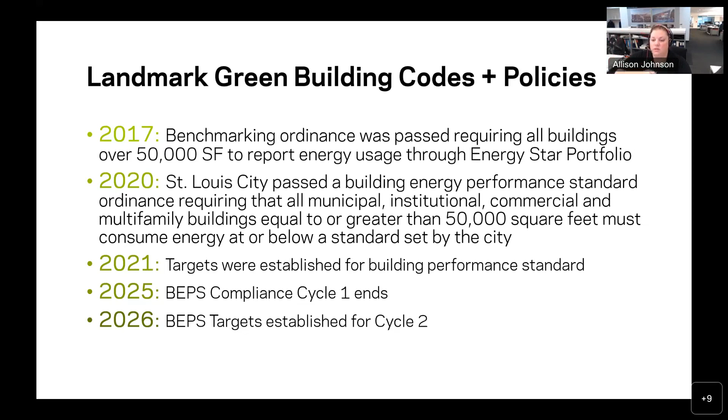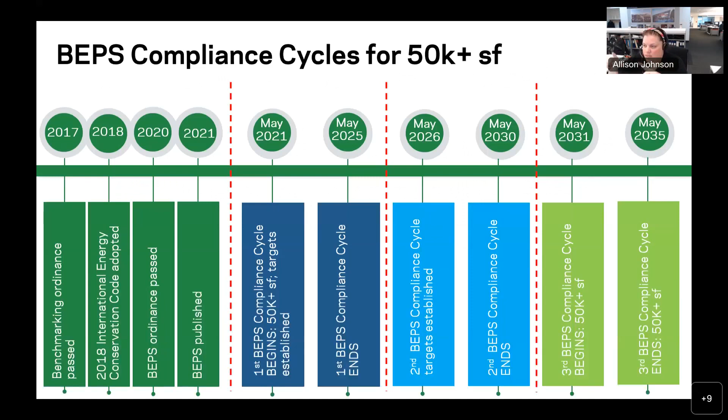It's critical that we are all informed and understand how all of this works. And then cycle 2 basically will be started based on those numbers in 2026, is another way to look at it. You can see the timeline: yes, it ends in May of 2025, but it's 2024's numbers that will be reported in May. Then in 2026 we'll know what the next cycle is based on.

And this is what I meant by the line in the sand. We are being compared, all of our projects are being compared to buildings of the same type. And as Emily eloquently put it, 65% of our buildings in the city of St. Louis will need to make improvements of some sort, whether that be retro-commissioning or some sort of energy efficiency measures, in order to get below that BEPS line, and that is based on our local data.

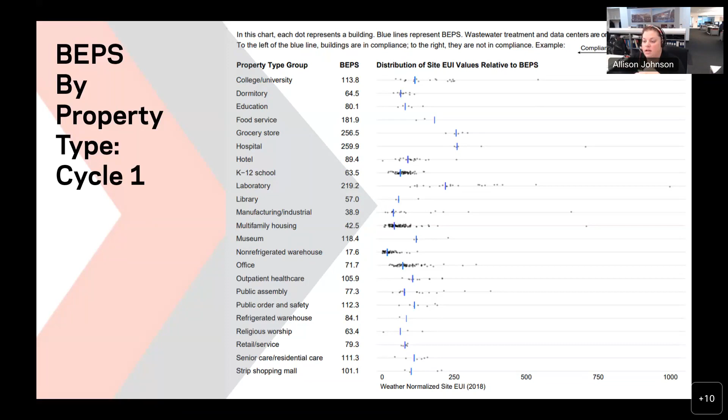So it's based on our local site EUI, and it's based on building type, and everything over 50,000 square feet. So we will get into energy modeling and CDs.

All right, so we talked a little bit at Module 1 and 2 about the ASHRAE 209 standard, which is a really good standardization of what type of modeling you might want in the design process, what kind of feedback you're looking for, what kind of workshops you might hold and when, who should be participating or discussing or even running the model, and which cycles you may or may not want to include in your basic services or as additional services.

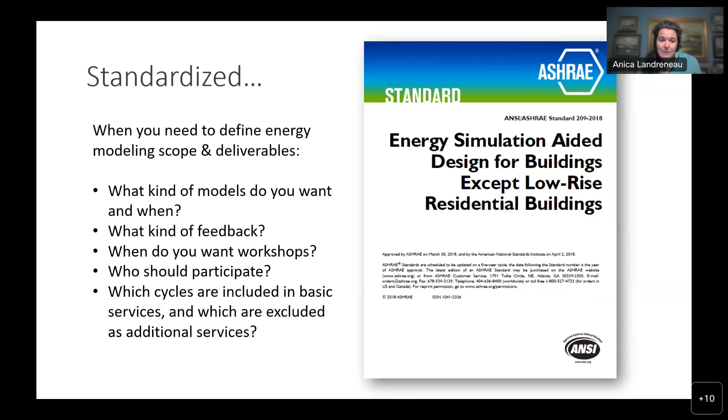So that continues all the way through design, as we've discussed in Module 2, and all the way through even CDs as you wrap up design on the project. It may even continue into construction. Go ahead.

So in the last module, we talked about the general requirements, load reduction modeling, and then some of these, as the standard considers them, optional design model cycles. We did talk about the last two, design integration and optimization, and energy simulation-aided value engineering as well. But it's important to note these do overlap between the concept, SD, and DD phases we've already spoken about, as well as construction documents, which we're talking about today in this module.

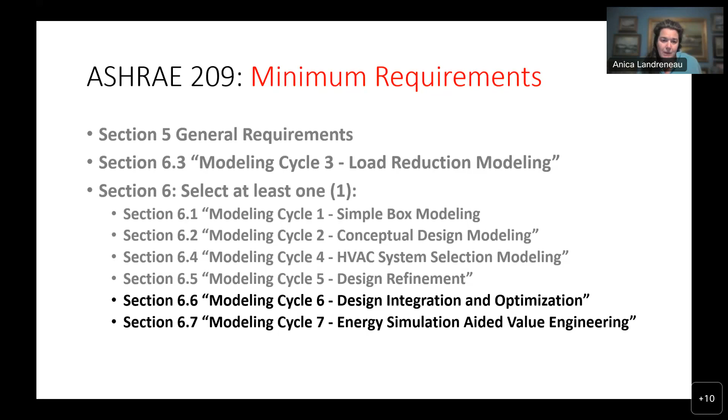We also just touched on the as-designed energy performance model. Now the 209 standard considers that a construction phase cycle, but really what it means is you're 100% done with design, your design is complete, and you're recording everything that you issued for construction. So it's kind of in that space during bidding and negotiations, that closeout of the design phase.

In the construction administration phase, there are also modeling cycles for change orders, as-built energy performance, and post-occupancy energy performance comparison. These are often additional services because you don't know what you need until you get into construction administration, but we'll go through what they're for and when you might want to use them.

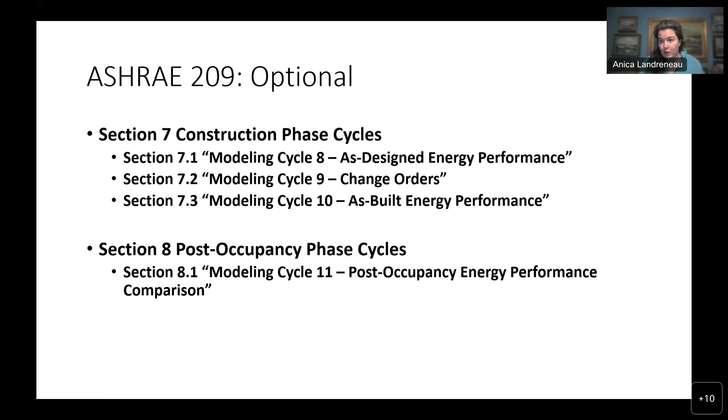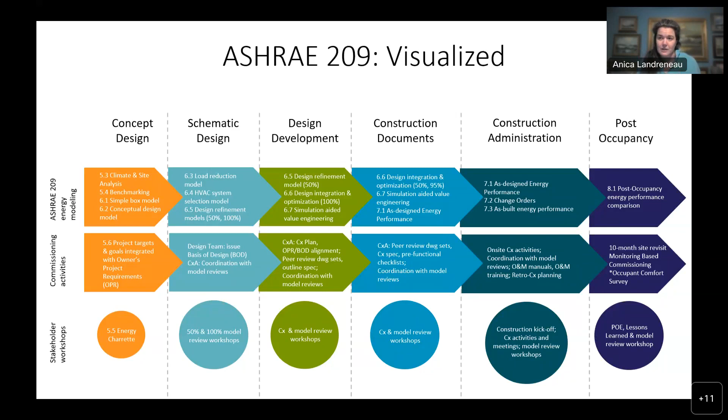This is all about keeping your eye on the ball. You've set targets with your owner prior to design, and with the team during the design process, iteratively benchmarking the design against those targets. Now this is making sure those project performance goals are executed during construction documents, become part of the construction documents, and are executed again in construction administration.

So we're going to get into specifications a little bit. I know our spec writer is on the call, so I won't call them dry, but the slides are dry. We'll establish that off the bat. But what we're really sharing are the ways HOK has started to include these in our specs. We're not saying this is the way you have to do this, or to copy this verbatim, but this is a suggested pathway towards implicitly and explicitly sharing how the BEPS can influence your project and then ensuring how that's incorporated.

So we're going to go through these different sections. I think specifications are kind of interesting myself. It's like the story of your project. You have the illustrations, if you will, in your drawing set, and this is the narrative. It really does tell the story of everything that goes into the building or project, and why. So I really get excited about specifications.

Most firms start with a master spec format, then have their own firm-wide customization layered on top, and then per-project customization. This is our approach: that formulaic master spec with our own modifications we'd generally apply, and layered on top of that is the language for building performance standards.

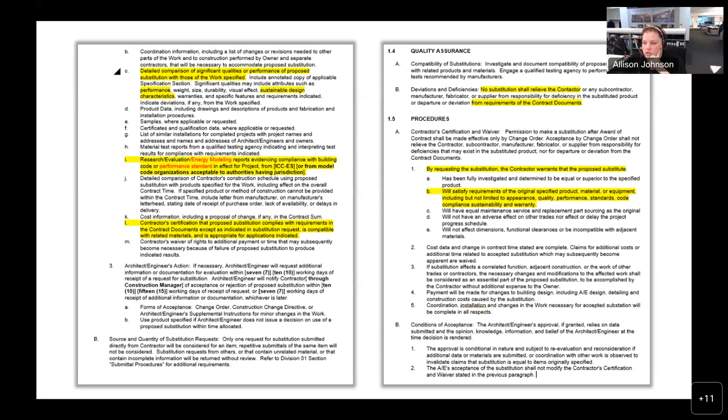I'm just working on a federal project in Salt Lake City, and one of the cost saving measures was to remove the mineral wool insulation from the project. So we were able to get the same energy code, but it was another different aspect of sustainability that we were concerned about, and had to rerun the embodied energy calculations by switching it to spray foam, which was much higher than mineral wool, except that it was a very low percentage of the overall impact of the embodied energy of the building. So not totally related to BEPS, but something we've run across recently.

And then the additional language here is: requested substitution provides energy performance characteristics that specified products provided for achieving the building energy performance standard. So explicitly stating it in the section under products. And then additionally, requested substitution provides energy performance characteristics that specified product providing energy - so twice, depending on which substitutions section.

For cause and substitutions for convenience - there's different reasons you might have a request. You want to make sure the language appears in all of the different substitution language. But it could be a glazing unit, it could be insulation, it could be clips that hold the cladding to the building that might be thermally broken versus not thermally broken. There's all kinds of things that might be impacted by a substitution at this stage.

So you want to just make sure there's a reference point here that says this does need to uphold not just the energy code, but the performance standard target as well. And not just HVAC equipment because of lead times.

We have added a little modification here too. This is just the form, but it's the same language as the previous slide, where proposed substitution does not affect the compliance with the building code or performance standard in effect for the project. And this is an application for that substitution. So when the contractor is filing an application for that substitution, they are attesting by signing this form that they have already verified that the product they're asking to substitute would not alter the building's compliance or the project's compliance with the building performance standard.

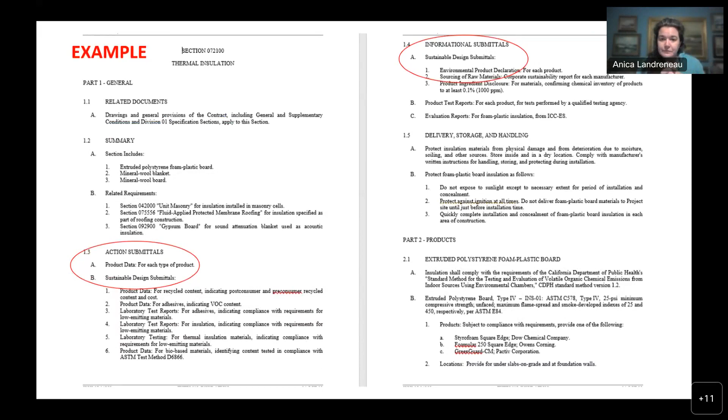The next section we looked at is quality requirements. Towards the end, under the quality requirements, we have a lot of our testing. So if you are doing things like enclosure commissioning, assembly testing - this is where you may want to include some of those criteria.

These criteria may be enhanced because of the performance standard and the overall performance requirements of the project. It's also consistent with the energy code and commissioning requirements within that. Under pre-construction testing is where Anica brought that up.

The next section is product requirements. Under definitions, comparable product is something we believe definitely overlaps with BEPS and in-service performance. We're currently addressing some of those things, but under submittals is where we would see additional requirements.

Some projects can't use proprietary specifications - maybe it's a public or institutional project, or we're providing something that basically sets the performance standard but we expect different comparable products to be submitted for approval. This is just something to note.

We're not adding new language here, but this is a section which could refer to the building performance standard and energy performance of the product - using your specifications in this way.

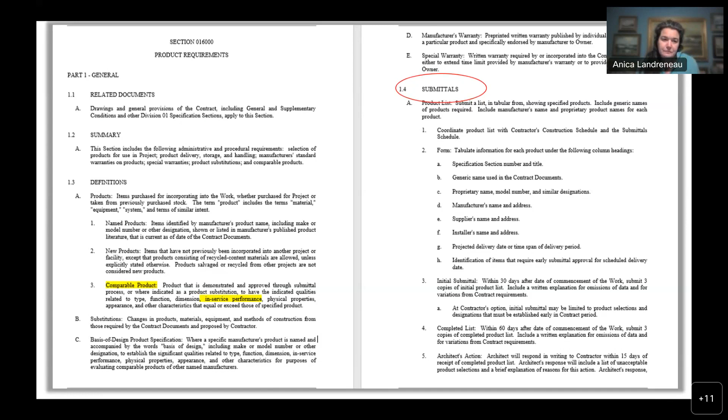Here's some more samples of product data sheets where we might be looking for thermal information and requiring it. As noted, you might be looking for multiple attributes - embodied carbon, R value, emissions and air quality data.

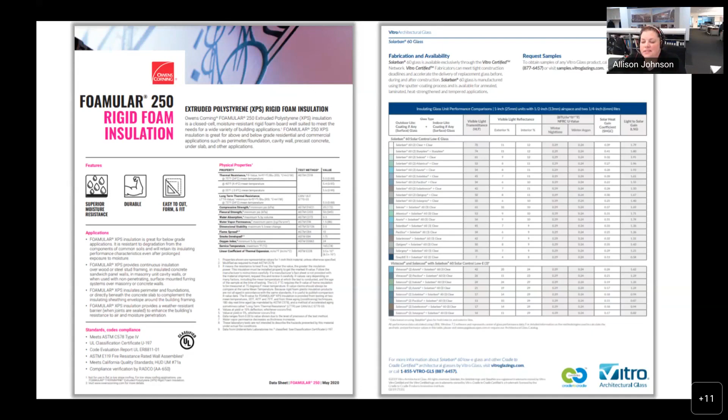It's important to look across all attributes included in your specification, particularly with a substitution request. One that came up in a meeting today was sound - we had a lunch and learn today about sound quality and transfer of sound, so always measure things against multiple data points.

Substitution requests - this part of the section highlights detailed comparison of significant qualities of proposed substitutions of the work and research evaluations. What we added here is evaluation reports evidencing compliance with building code or performance standard.

In effect for the project, from model code organization, then adding local code or building performance standard development body, acceptable to the authorities having jurisdiction. We note this because sometimes the buildings department and jurisdictions aren't setting the standard nor necessarily evaluating compliance with the standard.

So we don't want to just refer to model code bodies or the buildings department. We want to make sure we've added enough language to sufficiently cover the different entities within a jurisdiction that may be enforcing the building performance standard and setting the standard in the first place.

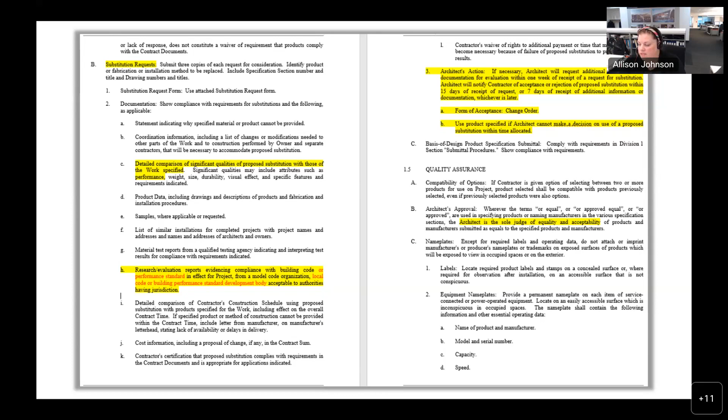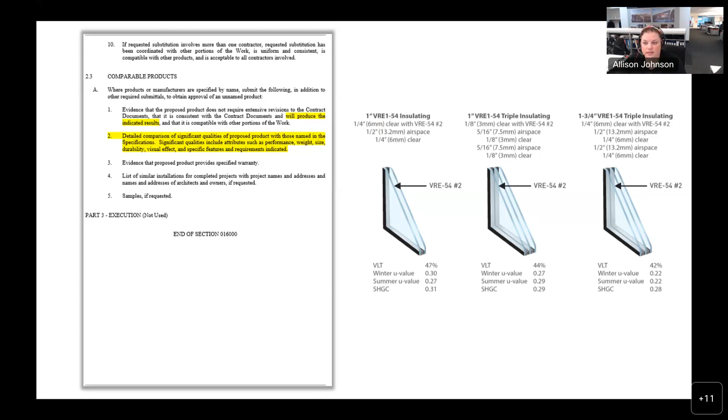In addition, we're highlighting the architect's action statement and reminding that the standard specs also include that the architect is the sole judge of equality and acceptability, which applies to the building energy performance standard. Under comparable products, we're looking at whether it will produce the indicated results, and the standard includes a detailed comparison of significant qualities of proposed products with those in the named specification. Significant qualities include attributes such as performance, weight, size, durability, visual effect, and specific features. So again, we're measuring against multiple attributes of these products, but reminding that we have the ultimate say in whether that gets included.

If you are working on a LEED project, you've probably already seen this section for sustainable design requirements, and this often includes LEED meetings and action submittals, LEED requirements for sustainable products. This is something that can be aligned with building performance standards.

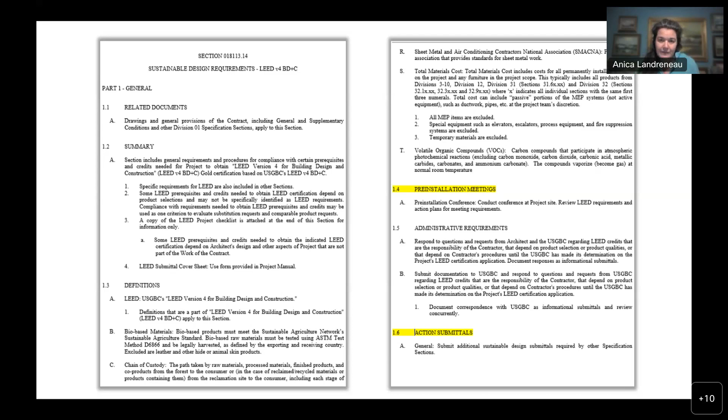We actually created a new section that can go into our specifications, in addition to or when it's not a LEED project, all on its own. It references back to the language discussed with E204, the owner-architect agreement, and our architect consultant agreements, making sure these same terms already defined with our owner and consultants are now defined in a contract document for the general contractor and their subs. There's a reference back to compliance period, building performance compliance, building performance reporting, etc. We think it's really important to get that language replicated in this contract document for construction of the project. This example references DC code, but I'll be adapting it for St. Louis on two upcoming projects.

Most importantly, at the end of this section, we included a summary of the energy model report, the final as-designed energy model report. You can attach an entire energy report if you'd like, but in this case, a summary that says: here were the modeled kilowatt hours, BTUs, site energy use intensity, source energy use intensity, greenhouse gas emissions, energy cost, annual energy cost, annual energy use targets, Energy Star Target Finder score, whatever outputs you think are important, putting those in the contract document as a point of reference.

So after that, they kept the language in. It really is about mitigating risk. How much cheaper is it to energy model a few extra rounds than to be out of BEPS compliance? I think that's what we remind our contractors at those moments.

So some of the modeling that might help support keeping our eye on the ball during construction includes the change order model and as-built model. An as-built will come at the end of construction, and the change order could happen on an as-needed basis.

So the change order modeling cycle defined in the 209 standard is what it sounds like, but it applies when you have a substantial substitution request that you think might materially impact performance outcomes of the project. That could be unavailability of materials or products, long lead times, client-led changes, preferences, or value engineering to keep the project on budget - we know escalation's been an issue of late.

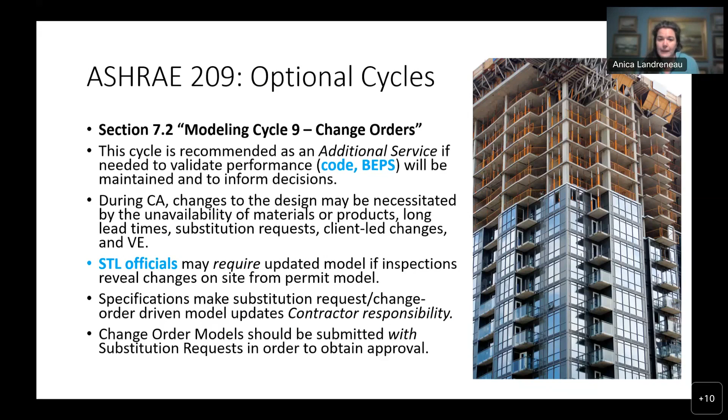This change order model is defined in ASHRAE 209, and it's basically about making sure that if you were to proceed with the change order, does it continue to comply with our performance expectations, or does it deviate too much for us to approve it? So it's validating performance before you make that decision.

We think it's important to coordinate this with commissioning and enclosure commissioning, making sure your commissioning team is part of the review of the model outcome or output and discussing those changes. They were part of the design process, so making sure they're part of this in construction is important too. If you need to update testing requirements for a different assembly, make sure everyone's on the same page, and that you've got an additional set of eyes on any unanticipated conflicts or issues that might arise from the change.

One of the things I highlighted there - as I said throughout the design stage - it's really important to document and communicate.

If an owner decides they don't want to see an updated model and they want a change approved, or they get the output of the model and it says it's going to negatively impact building performance but they want you to approve it anyway, document that direction and the conclusion - whether this was not modeled at the owner's direction, or it was modeled and we think it might negatively impact energy performance, and we've said so but decided to proceed anyway. Document it, communicate it, circulate it through meeting minutes, send a letter to the owner, making sure everyone is aware this might have an impact on building performance standard compliance down the road. Hopefully this curbs those decisions, but if not, at least there's a record of when they were made and why.

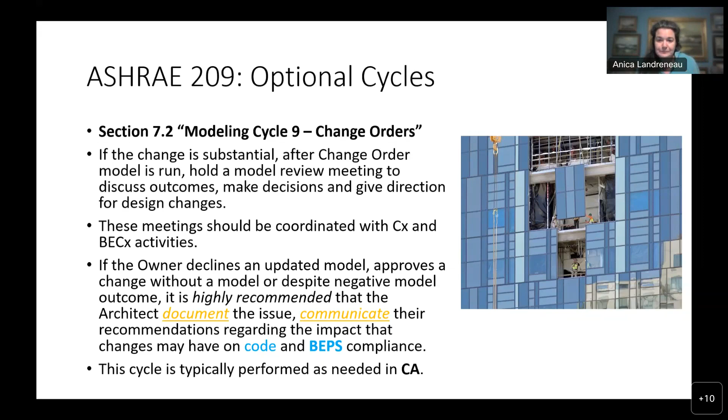Finally, just as at the end of design we had a 100% design model, this is basically the as-built energy performance. If there aren't a lot of changes in the project design during CA, you may not need this, but sometimes there are. We do a lot of research facilities where at the beginning of construction there's still a lot of shell space, but as we get through construction they identify tenants or partners and we start designing that shell space and fitting it out. So the design has changed quite a bit along the way, and by the end of construction we actually have a substantially different understanding of the building than we did going into construction.

There are other examples where you may have additional information or changes to the design, changes in use, or changes in tenant expectations - maybe you thought it was going to be one type of tenant, but you ended up getting a grocery store on the lower level, what have you. There's reason to update and have an as-built performance model so you understand how that building was actually built. Also, if you accepted a lot of those change orders, collecting all of them into one as-built model helps you understand what that total picture looks like.

We see this often in the Cortex projects, where we don't know what the makeup of office to lab space will be, and it can change significantly over the course of the project. But that can help us with benchmarking and figuring out what the makeup is, so that when we start reporting for BEPS, or when the owner does it with Energy Star, we know what that makeup is and what the baseline should be.

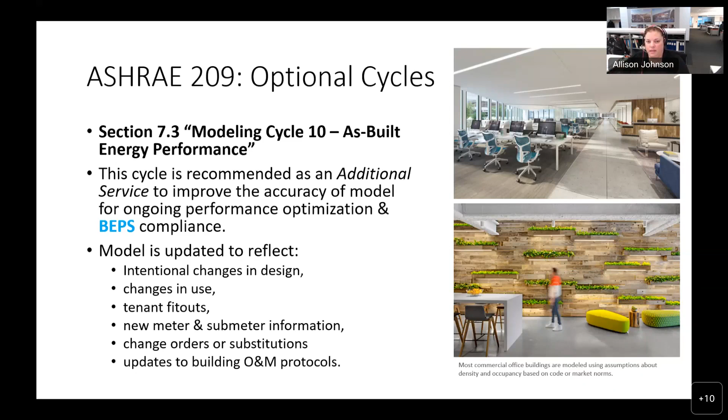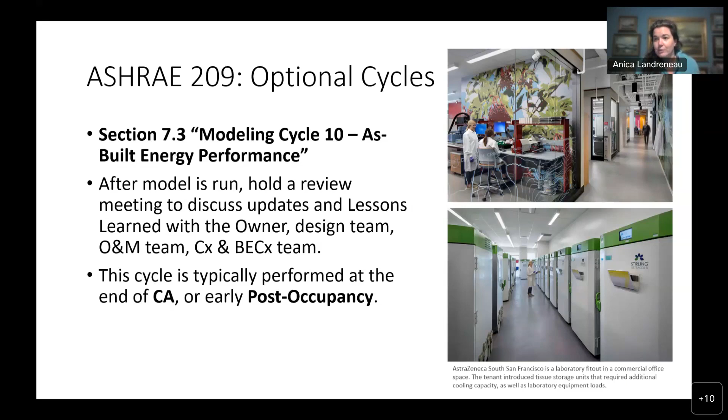Once that model is run, it would be great to have an update with your O&M team, the owner, and the commissioning team, just to understand if there are any changes in how the building should be operated or maintained, or any changes in expectation about building performance. This is before you have measured performance data, as you're turning over the building, so everyone knows what to anticipate. It's problem-seeking before there could be an issue, rather than waiting until the tail end of a year or two of performance to find out. This is usually performed at the end of CA or very early in the post-occupancy turnover timeframe.

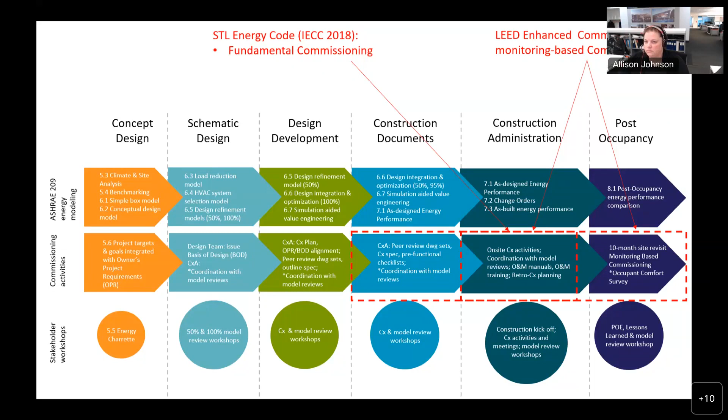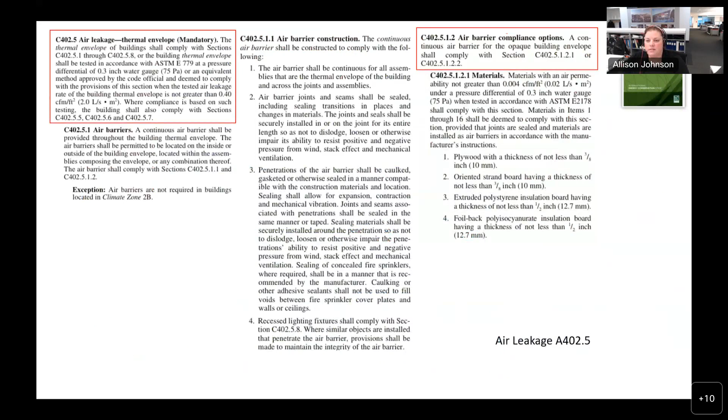We talked a little about this in the last presentation, but as a reminder, with commissioning, what's required here in St. Louis under IECC 2018 is fundamental commissioning, as compared to enhanced commissioning, which is what we do under LEED or on projects that require it, overlaid on the ASHRAE modeling. This is located in IECC 2018 under the air leakage requirements and air barrier compliance options. The commissioning plan has to be established, systems adjusted and balanced, and a commissioning report has to be issued in order to get occupancy.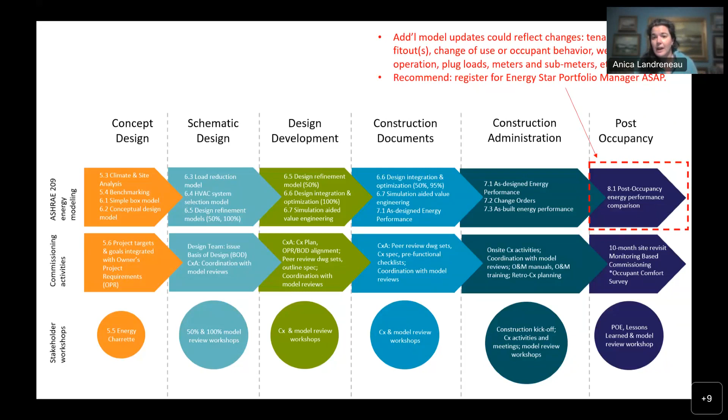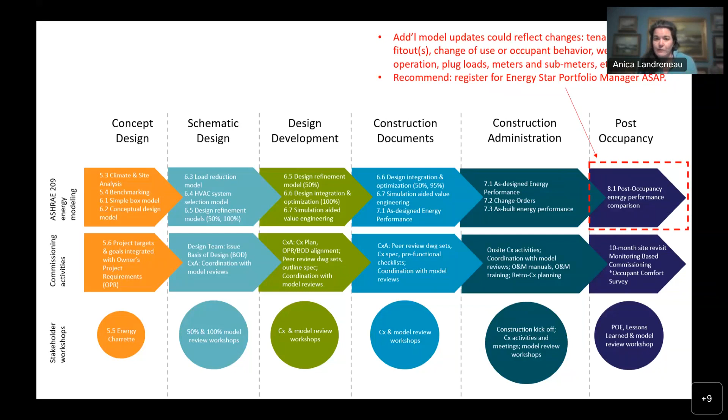The other thing we'd say is at turnover, we highly recommend you tell clients to register for Energy Star Portfolio Manager as quickly as possible. Just start laying your data into Portfolio Manager month after month. It's really useful to compare your building to its peers, to see if it's performing within range—not just of the modeled expectation, but of peer buildings and their performance—as well as making sure it stays in compliance with the building performance standard.

Sometimes there's really great data. I mentioned in Module 2 this inpatient mental health facility we did for the state of Oregon. This is one where we leveraged some really unique strategies with setbacks, code variances, demand-controlled ventilation, and lighting in patient rooms. When we modeled it, it came out at 90 kBTU per square foot per year site energy use intensity. After it was delivered and fully operational, it was performing at half that—about 45 kBTU per square foot per year. It turns out patients were spending so much time out of their rooms, participating in group activities and other things, that their rooms really were turning down the way they were designed to, but at a rate far higher than we had anticipated in the model. So we got really good feedback by comparing actual performance to our design expectations. That helps us in the design of future facilities, but it also helps the owner understand why it's behaving differently than expected.

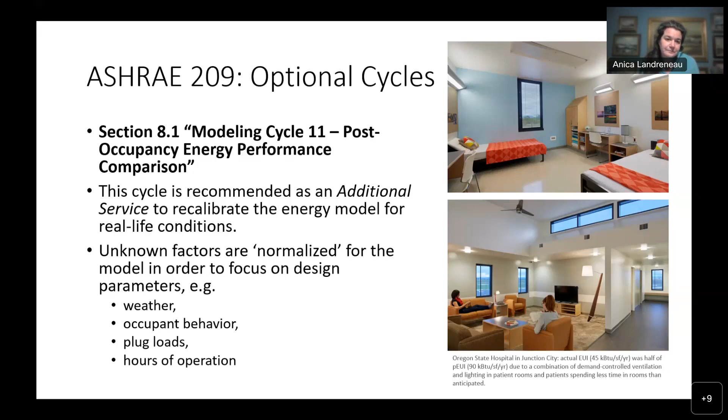Just a reminder of the owner requirements here—we mentioned this too on the ASHRAE overlay—benchmarking is required and annually reported. I believe May 4th is the date, though I could be wrong. BEPS starts May 4th as well, so that data goes into the system.

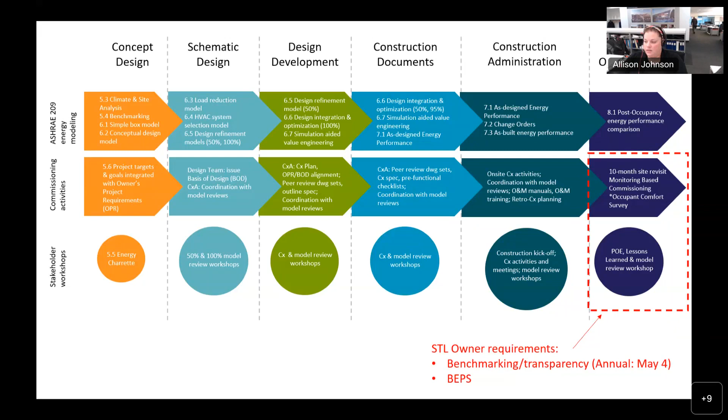So if you're entering that data and your post-occupancy performance isn't what you expected, leverage that model as we mentioned to identify and use it now as a problem-solving tool. If I don't meet BEPS, what do I do? Use that post-occupancy energy performance comparison to identify in which ways your actual performance doesn't align with the model, and that can help you hone in on some fine-tuning and tweaking you might want to do.

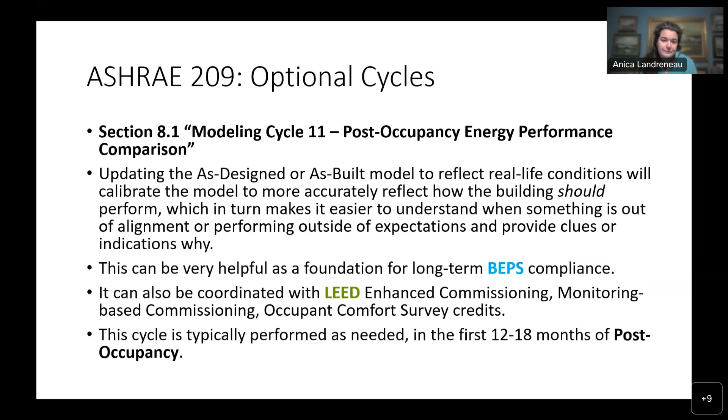We did show at the end of Module 2 some of the ways buildings don't perform as expected and some of the reasons why. We talked about design strategies that might help, like sub-metering, and O&M strategies like enhanced commissioning where you're doing peer reviews of the design and updating your energy model more regularly. In post-occupancy, or as you're leasing the building, we highly recommend owners in these jurisdictions with BEPS look at their lease language and maybe update it to support responsible tenant energy management.

There's two players when it comes to BEPS: the base building and the owner of the building with those core HVAC and lighting systems, but there's the tenant and all of their fit out, their systems, their lighting, their plug loads. So some kind of recognition in the lease agreement for that breakdown and who's responsible when things go awry.

We do recommend that Energy Star Portfolio Manager is updated regularly, even if it's quarterly, but not waiting till the end of the year to cram it all in, right before your May 4th deadline.

We recommend the owners that O&M training that you might have done for LEED or for your commissioning requirement be updated every 18 to 24 months. It's not something you can do one and done, and people operating the building expect that training to last a lifetime. You have staff turnover, but people often won't remember what they learned. If they learned during one season, they might not remember all the steps to take during other seasons.

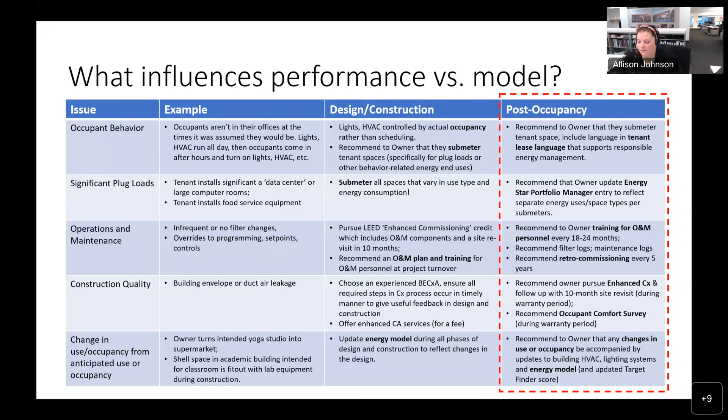And then we reviewed this last time, but I'm going to have Anica just go over them again. I don't know if you all know this, but Anica helped get this legislation passed and presented before Congress on this, so she is a good authority on what the contents are of this legislation.

Yeah, there are incentives now. There are going to be state and local incentives, so definitely check with your local utility as well as city or state incentives. But under the Inflation Reduction Act, if you're building multifamily, single family as well, but for the first time, multifamily homes can apply for the Section 45L home builder tax credit. So per unit, you're eligible for up to $2,500 if you meet the Energy Star requirements, and $5,000 per unit for meeting DOE's Zero Energy Ready program. So it's a huge incentive to design a great building from the get-go.

And Energy Star and Zero Energy Ready have things like air leakage testing and duct leakage testing, whole building and duct, insulation inspections. There's all kinds of great things there to help make sure the building is positioned to perform well, and here's money to make sure that you can afford to do that. This goes into effect January 1st of next year, and it's been extended for 10 years, so this is available for quite some time if you are undertaking multifamily projects.

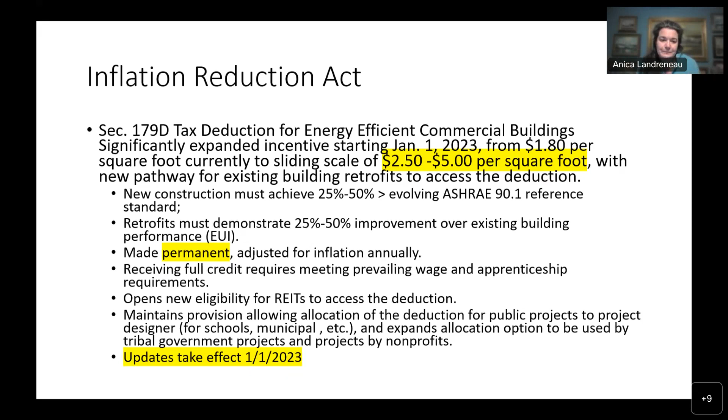And there's also additional incentives for things like EV infrastructure. So if you want to install EV-ready infrastructure, EV charging stations, you can get up to 30% of those expenses covered, up to $100,000. So that's pretty exciting as well. We know decarbonization and electrification are starting to be very popular with new construction or major retrofits. Here's a way to make your building EV ready.

And as I learned just recently, it is required in the city of St. Louis - I think it's 2% of all parking spaces if you have over 50, and those have to be EV, and 5% have to be EV ready, I believe. And the federal tax incentives don't care if you're required to do this locally or not, they're still available to your project. We had that asked on one webinar.

And then the clean electricity tax credit expands the investment tax credit for clean energy investments and combined heat and power, solar, geothermal. This also includes microgrid and energy storage technology, dynamic glass or electrochromic glass. And then starting in 2025, this will convert to a technology neutral structure with a similar incentive structure just based on greenhouse gas emissions reduction. So up to 30% of the cost of the project of the technology you're installing. This is the first time energy storage has shown up, or microgrid.